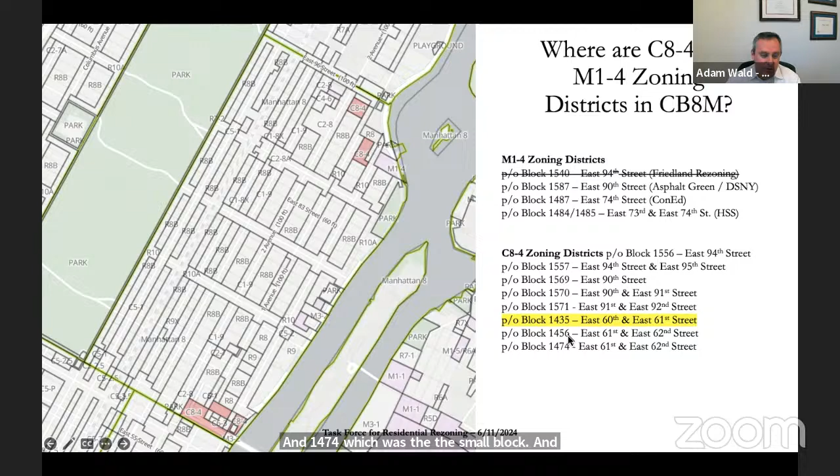Again, what is permitted in the districts we are aiming to rezone, M1-4 and C8-4, they're generally heavier commercial uses: office uses are permitted, life science uses are permitted, schools, dreaded self-storage uses, manufacturing, warehouses, auto body, parking garage, and hotels by special permit. The key and the reason we are doing this is that residential uses are not permitted in the M1-4 and the C8-4, and in the task force for residential rezoning, we are seeking to rezone these areas for residential development.

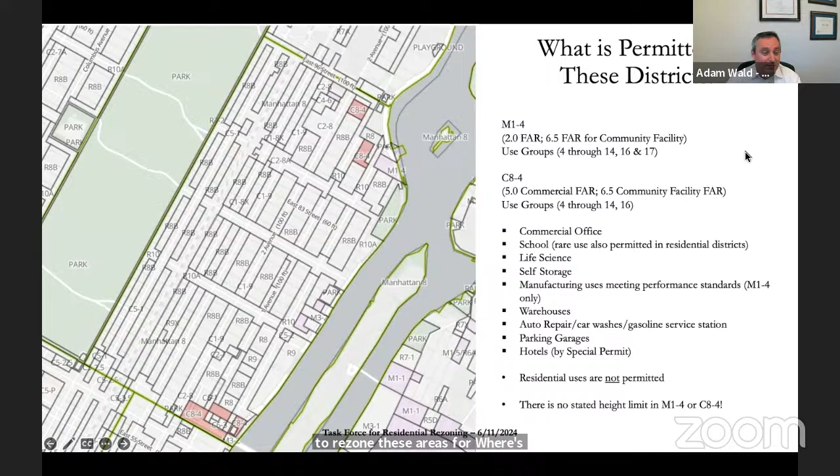Next slide. Again, a review of the hypotheses that we've put forth to understand why we need this rezoning and some of the ways we're going to get there. Our hypothesis was that the FAR is equal to or greater than 6.5 FAR, which is the FAR associated with community facility development of the M1-4 and C8-4 zoning districts. So if nothing changes, all of those sites mapped in the M1-4 and C8-4 zoning districts can be developed to a 6.5 FAR. The key is that there is no stated height limit under those zoning districts, though there is an effective height.

The next one is we want to make sure the FAR for all lots meets the MIH requirements. As a recap, MIH stipulates that if you are under 12,500 square feet of residential zoning floor area, you do not have to comply with mandatory inclusionary housing. If you are between 12,500 and 25,000 square feet of residential FAR, you can opt out through a payment, set pursuant to whatever community board you are in. Above 25,000 square feet, you have to comply with mandatory inclusionary housing. So our goal here is to make sure those sites, and potentially assemblages formed subsequent to this rezoning, are large enough, or that the zoning is dense enough, that all sites will comply with mandatory inclusionary housing.

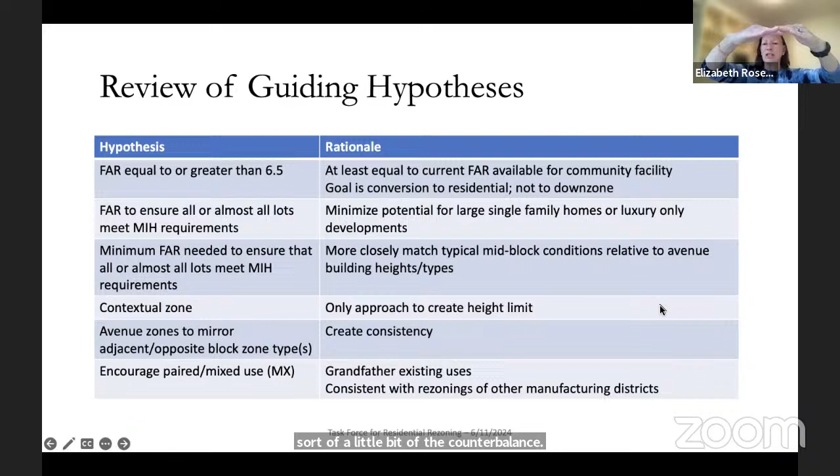And that's going to be important for side street zoning as opposed to avenue zoning.

Contextual zone - with some of the underlying zonings, the M1-4 and the C8-4, there is no stated height limit. So the idea is that for certain districts we look into, we will establish a contextual zone which will have a stated height limit. The stated height limit is TBD.

The next bullet point is the avenue zones should mirror the adjacent opposite block zone types. We talked about this in the previous meeting - there was an argument that the zoning should only be 210 feet, 240 feet, but then you look around and there's 300 something feet across the street, 400 feet across the street, 500 feet across the street. Does it make sense to not match some of the context in the neighborhood and create consistency?

And then lastly, we want to encourage paired mixed use districts, so we're going to grandfather some of the existing uses. People who have participated in previous meetings have talked about the need for some sort of quasi-manufacturing use, some sort of auto-related uses. We're not trying to do away with those uses specifically - we're trying to create a zoning district that can incorporate those existing uses, but also will provide for residential density.

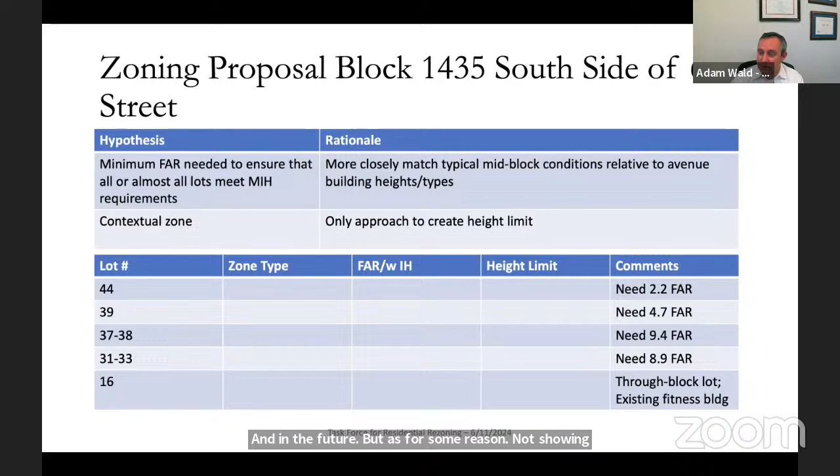Lot 16 is that through-block lot, it's the existing fitness building. So there, it's not so much the FAR that is a challenge. If you go back two slides - lot 16, 33, 37, and 38 are all part of one merged zoning lot right now. Not to say the zoning lot couldn't be severed in the future, but for some reason it's all one zoning lot. There was acquisitions of development rights and it's all one zoning lot. So just keep that in mind.

16, 37, 38, did you say? And 33. Okay, right. So it's these three buildings - these are all tenement style properties, plus this part of lot 16. Well, all of lot 16, it's all one zoning lot, but yes. So in other words, all of this is one zoning lot today. That's right. Okay.

So here's a case where our decisions or hypotheses are a little bit in conflict. Some of these lots need a very high FAR to require MIH, and we want to require MIH. On the other hand, we want to minimize the incentive to redevelop existing residential buildings. And the opposite block is R8B. So how do we solve this conundrum? One question is, could you go with a lower FAR but require a minimum lot size for redevelopment? That's kind of a question. I don't know enough to know the answer to that. I think Adam thinks that that is a possibility.

I do. But in absence of that, or maybe even considering that, I think the balance of the argument really goes towards keeping the R8A or R8B on this block, minimizing any incentive to redevelop existing residential buildings. And the opposite block is R8B, so we do want to try to be consistent with the opposite block on the mid-block. So I get to a proposal here of stick with R8B for this side of the block.

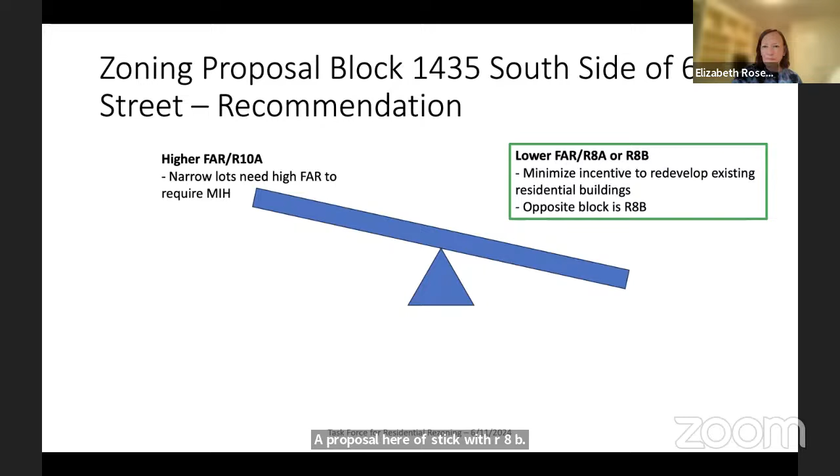Let's do the final piece of the block, and then we'll come back and talk about each of these in turn. The final piece of the block is the south side of 60th Street, so you're directly overlooking the bridge. And again, you've got a number of small, narrower lots west of the bridge. Then you've got a small lot here - this is actually fairly recent residential. You've got this large building here, the fitness center, which we'll show you photos of, and then three more smaller lots to the east of that.

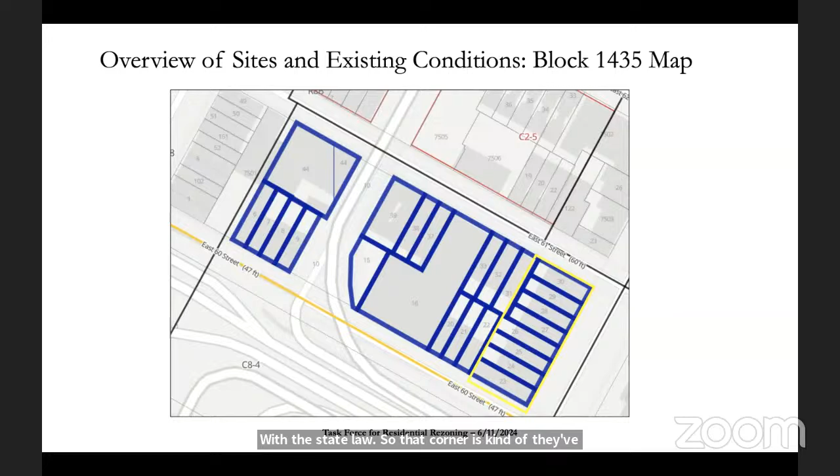Okay, so I don't know how changing the zoning would affect them. And if they think that they could sell their building and build a really big building on the corner there, going up the street and along the avenue, I wouldn't be surprised to see that happen. This is just my personal opinion, giving you what I know from having had some experience with them over the years. And I think the position of the task force is that would be a good thing. Well, I mean, getting a residential building with more units and replacing an illegal hotel, that seems like a good thing.

Well, I don't know that it's an illegal hotel. I remember seeing that some of the building classifications were associated with a hotel use, so I wouldn't want to call them out as operating illegally. Well, I don't know, we've had some problems with them—we've had murders there. You don't want me to go into it. It's got a long history. But the historian of the East 60s.

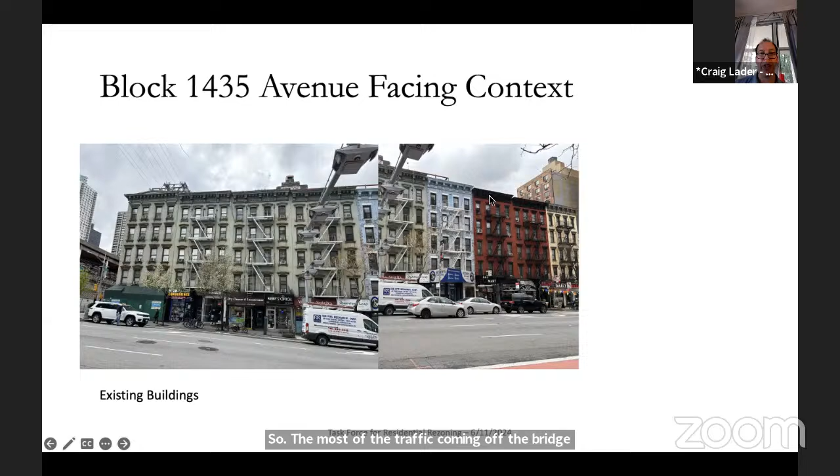Hi, everyone. I just want to make sure everyone was clear in terms of how the traffic patterns are there. So most of the traffic coming off the bridge actually is not going to hit 61st Street. The upper roadway exits onto 62nd Street. There's only one lane of traffic that comes off the bridge, and I believe that it's a bus-only access on 60th Street. So you have to go to 61st Street for that single lane that comes out of there. But otherwise, the upper roadway filters out to 62nd Street. Just want to make sure that that context was clear.

And then just in terms of that corner lot, I think, Elizabeth, you have put a lot of thought into that, and I think what you're suggesting makes sense. I think that is probably a place where we can definitely see some potential opportunities to build, and height limits would only restrict our ability to actually accomplish what we're aiming to over here at that location in particular. Thank you, Craig.

Judy, you had wanted to add? Yes, along with Craig, 9, I can't see, it's off my screen. 9 going up, can you move? 6, 7, 8, 9?

There's a very active bus stop there, and a lot of people waiting along that block. It's the Q59 bus, I don't remember the numbers. They go to Queens. Yeah, there's a Queens bus that then comes across and down, a bus that goes to the prison that comes there. That's a very active bus route. A lot of people waiting on the sidewalk, particularly up near 2nd Avenue, to catch buses. From that part of the mid-block going up towards 2nd, very, very active streetwise. And we have a very active bar as one of the resident occupants in 7 or 8, I'm not sure, or 6 and 7. So that half of the block is a very, very busy block, pedestrian wise.

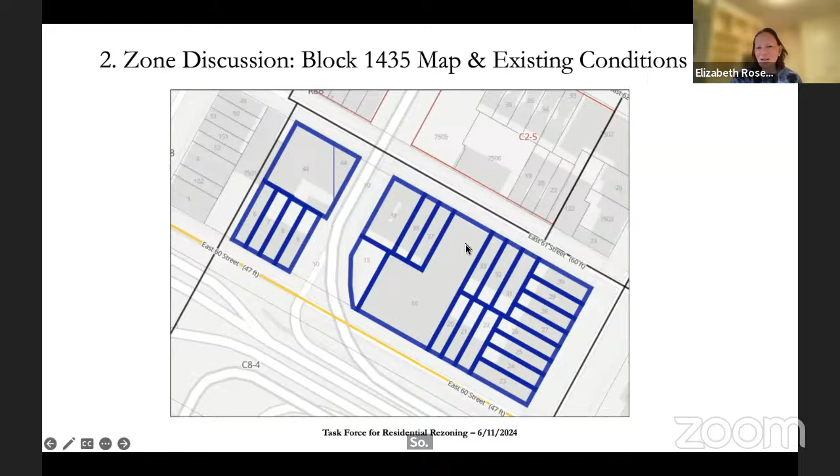To be fair, the 146-foot building is only that tall on this side. It's not that tall on this side. But we have a 90-foot building here. R8B under City of Yes actually gets pretty close to that. It's 105.

And here we have roughly 60-foot tall buildings at the moment. Are we shooting too low here?

I'm not getting a lot of feedback up here.

I think with respect to having R8B on the north side of the street, I don't think it's shooting too low. As someone who's on the backside of the East 94th Street rezoning, I wish that anyone took into consideration the context of the smaller buildings on the other side of the street. So I don't think it's unusual to keep R8B on the north side of 61st, and have 60th be zoned as R10, just because 61st is a smaller side street. I think just because there are two buildings that are taller, that doesn't make context.

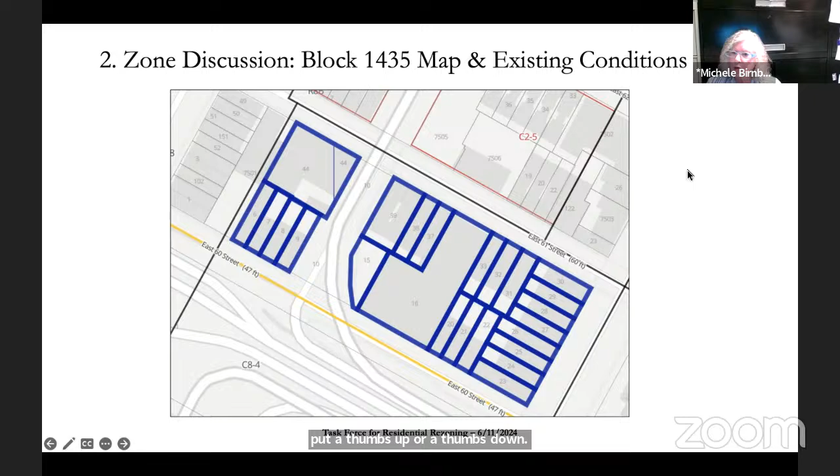So I think if you want to take a little poll in the participants menu, and have everybody just put a thumbs up or thumbs down, you'll get a better sense of it. At least I couldn't see it all. I don't know what you were able to see. Let's do that. I'm going to stop sharing this for a minute.

So Will, can you give instructions? Let me just give the first poll: will be Avenue fronting, 10 FAR, 12 MIH. Leave aside height limit or no height limit, just the FAR, Avenue fronting.

I would say actually go ahead and put the map back up because I think it's helpful for everybody as you're drawing over where it is. Sure. Yeah, I was just trying to see how people will say it will impact.

Everyone else, go to your React icon and press that button. It's going to open a menu with a bunch of different options. There's a green check mark that means yes and a red X that means no. So Elizabeth, just reframe your question. If you're on the yes side, click the green check mark, and if you're on the no side, click the red X.

Okay, a green check means that you agree that a 10 FAR, 12 with mandatory inclusionary housing is appropriate on the avenue, the area I am.

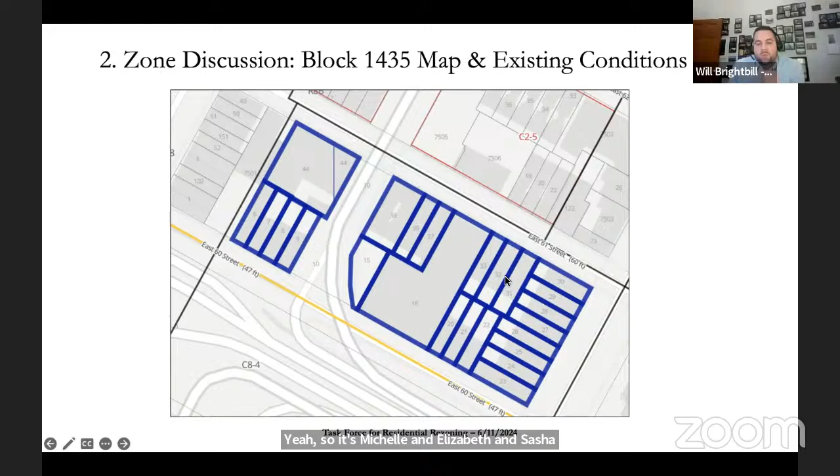Okay, you can verbalize yours. I'm a no on that. Okay, and then on the East 60th Street facing lots, yes if you think R10A is appropriate zoning. So that is 10 FAR, 12 with MIH, and a height limit on the lots facing the bridge. So, gonna wait for Elizabeth. Yeah, so it's Michele, Elizabeth, and Sasha are a yes on that, and then the rest are no's. Okay, alright, so that is very helpful.

Is there anything else or different that anybody wants to raise as it relates to these particular blocks?

Did you want to take a poll about the side street, the 61st Street? 61st Street, great idea. Okay, before we make that poll, I just wanted to reintroduce the idea we talked about before, which was that on some of these side streets, an FAR of the 6s or even a 7.2 might be appropriate in order to achieve MIH goals for certain parcels. So just something to think about, and wondering if that is an option you would like to look at here for this portion of the block.

All right, so let's ask two questions. Let's remind ourselves of what the FAR is for an R8B. It is 4.0, and with City of Yes, it will go to 4.8. Okay, so the next thing up from that is really R8A, I believe. Right, but that would be contextual, yes. That would be 6.02, and then it would be 7.2.

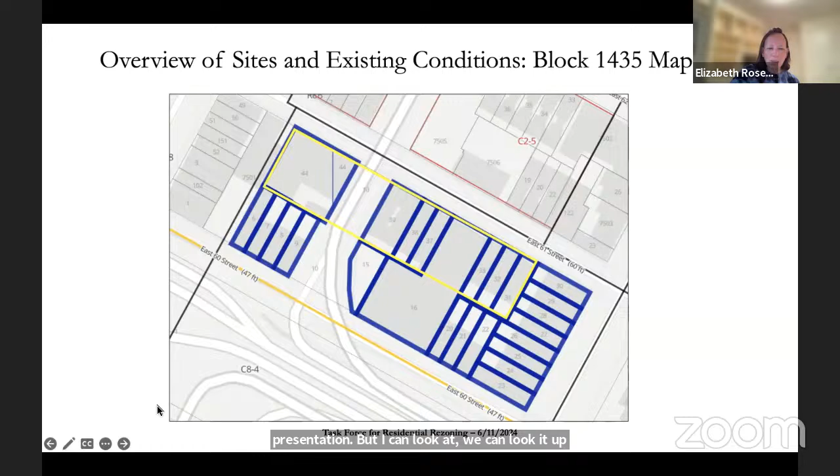With MIH. Okay, so let's do an A-B choice, and it literally is an A-B choice. So R8B is a 4.0 FAR, bumps up to 4.8 with MIH and City of Yes. Right, well it doesn't have MIH except unless City of Yes passes. And a height limit of somewhere between 75 and 105. An R8A gets you a little bit more FAR, 6 FAR going up to 7.2 with affordable housing. I don't think I've got the height limit in this presentation, but we can look it up. We had it in the prior presentation. So sorry about that, let me just look it up now.

So R8A has a base height of 60 to 85, and then it has a maximum height of about 125, which will go up a little bit under City of Yes, up to 145. Which is the height of the existing commercial mid-block building. There you go, what are the chances?

Okay, so vote green if you support R8A, which is the higher FAR, base of 6 going up to 7.2 with MIH and about 145 feet height limit. And vote red if you prefer R8B, which is a 4.0 FAR, 4.8 with MIH, which only happens under City of Yes - it otherwise does not have an inclusionary option - and a height limit of 75 to 105 feet. So green is R8A, red is R8B. Just waiting on Elizabeth's vote. Yeah, so Elizabeth and Michele are R8B, and the rest are R8A.